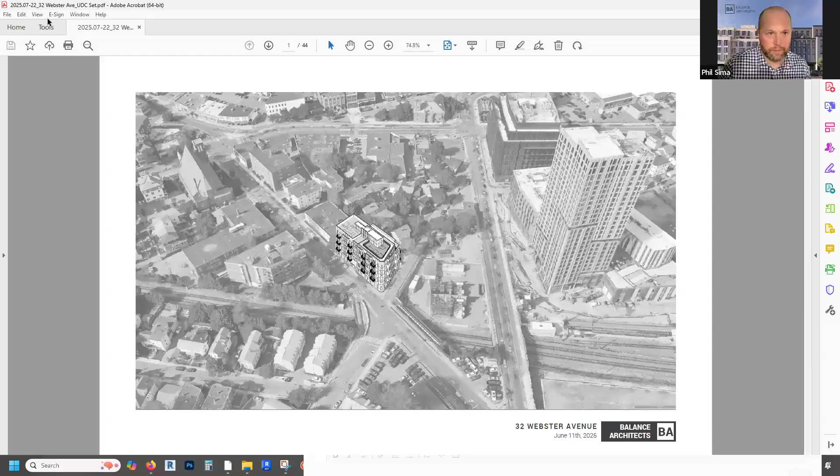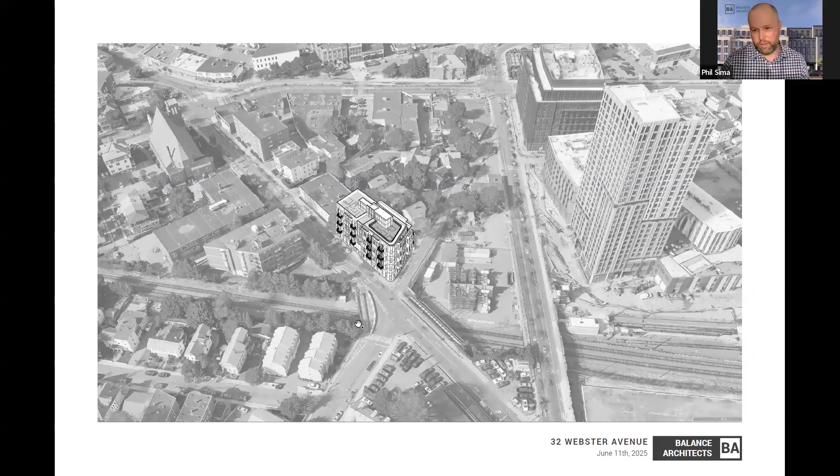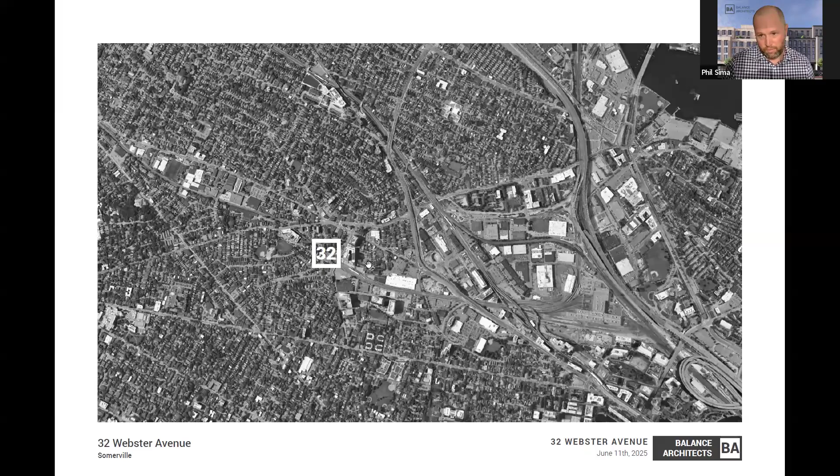Great, yes. Okay, so thanks everyone. So the project we're looking at is 32 Webster. It's right outside of Union Square on Webster, kind of at the top of the hill where the train tracks go down—there's a substation over here. It's an MR4 building, so very close to Union Square, right at the top of that hill, at the corner of Webster and Newton, both kind of sloping down from this high point on the corner, which we'll see in some photos.

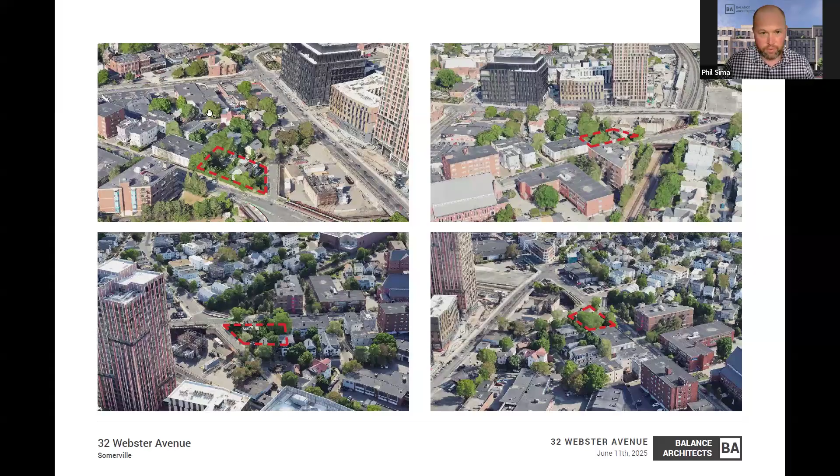So we're MR4, we abut some NR. We're not on a pedestrian street, so we're going to do an all apartment building, not a mixed-use general building, and it's very close to public transit. We do not have any vehicular parking in the project.

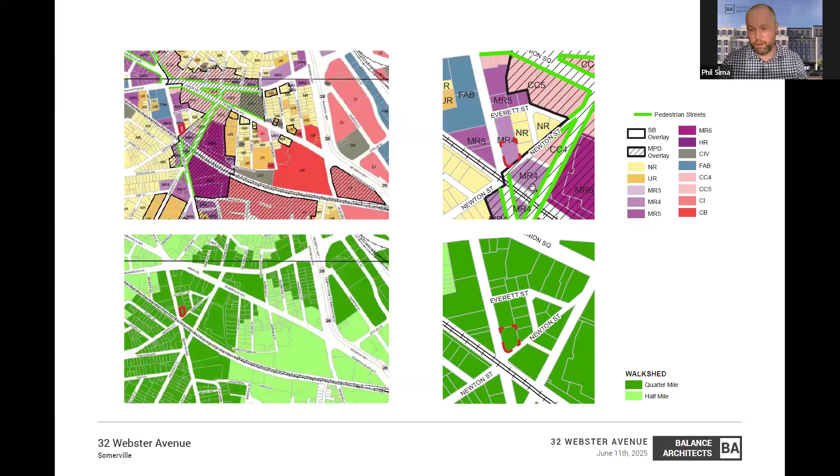So the general massing: it's one of these buildings that's longer than 100 feet, so we're creating two main masses to split the length of it along Webster. We have this primary mass to the left with some bays, balconies at the entrance, and the main residential entrance, which is on Webster. That is inset a bit, and a change of material happens there.

And then we have this kind of corner element that wraps up to the corner and down Newton, again with bays and balconies on the facades. So that's looking on Newton for that side of the street, and then again, this kind of really unique corner condition that we have.

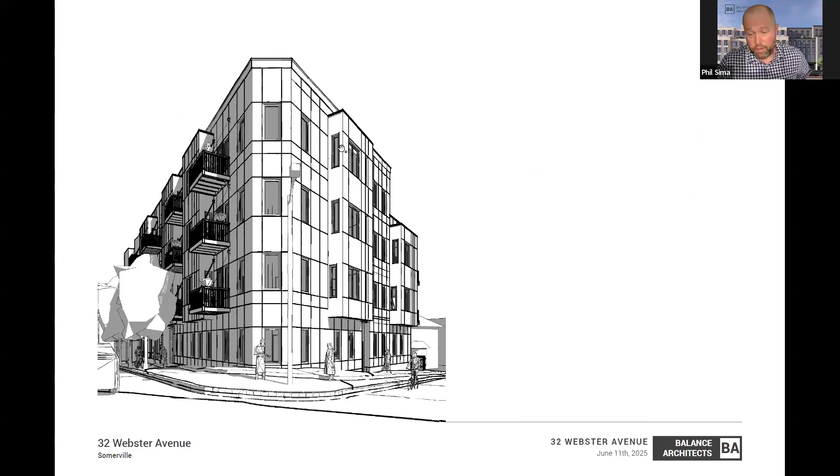The massing is really interesting here, just based on it being MR4 abutting NR, so we have to step back that top floor. It creates some great cascading effects. So on the top, we have a common roof deck for everyone with amazing views based on the orientation. And what you're looking at on that third floor are private roof decks for the units that face off the back there.

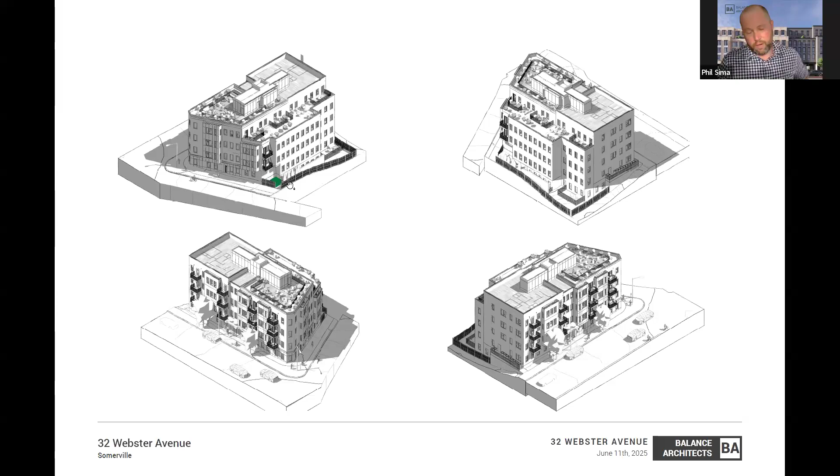And then you can kind of see some movement in the building based upon NR setbacks that are rear yard, not side yard, as well as we're showing a pad mounted transformer in that side as well.

So I won't go over the whole zoning, but I'll just do a quick floor plan review. A couple of studio units on the basement floor face out because the site slopes so much, so we actually have to make this a deck - the grade is lower than the building. There's some MEP and amenity space, and then on the ground floor, the main entry, as we said, is on Webster.

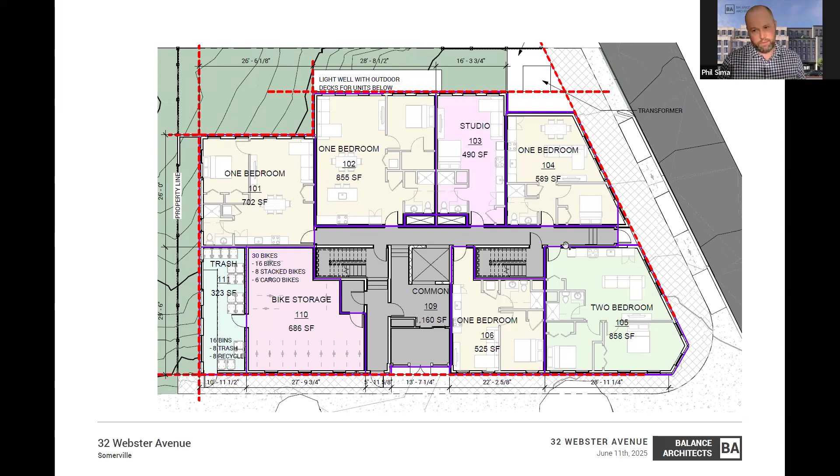We have one-to-one bike storage, a trash room that's accessible from that, and then one bedroom, studio, and two bedroom units. And typical 2 beds, 1 beds for floors 2 and 3. On that top floor is where we start to step back and see some of those private roof decks along that plan north facade, and then a common roof deck for everyone up here, with MEP happening to the left.

Just to be noted, we're in MR4, but there is a fully affordable housing project being proposed directly adjacent to us, I think fully accepted, that's going to be up 6 stories. So we're going to be kind of the small kid on the block when that one is done.

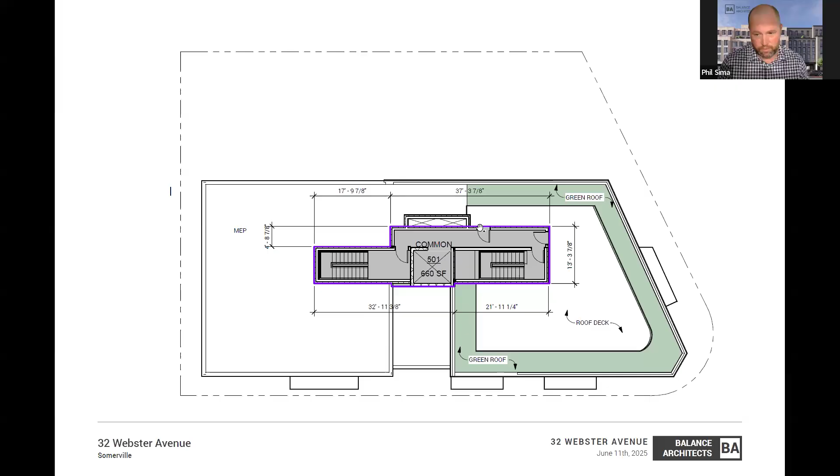So I'm going to let Aaron jump into more of the site plan, because I think in terms of architecture, this is our front entrance, this is the transformer side entrance. Aaron, are you able to jump on and discuss?

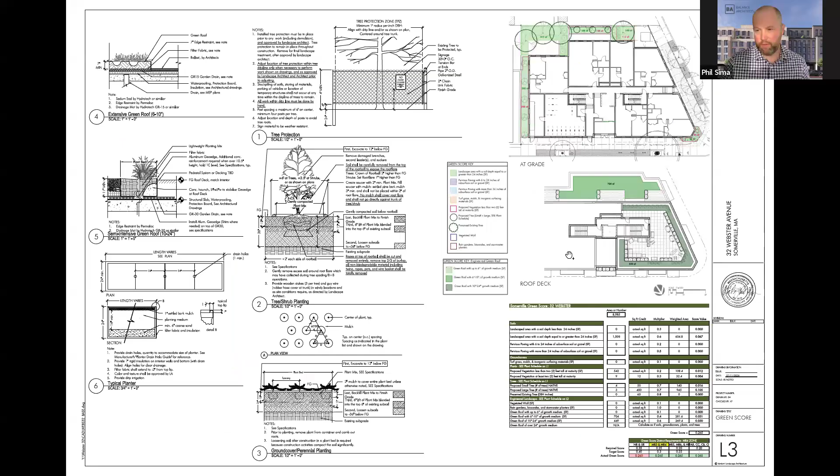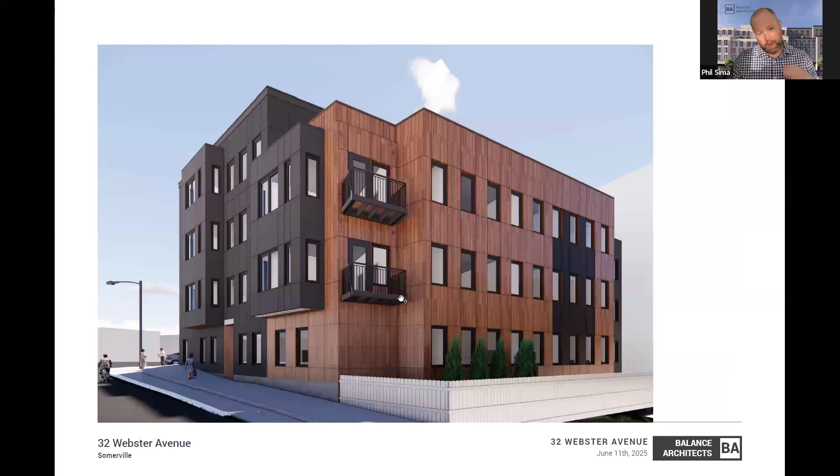When you wrap around the corner, darker material bands go all the way around Webster. Then this more natural looking wood facing the back, a rigid fenestration pattern that goes towards that side yard. There's no proper rear yard except when you get back here, and that's what this view looks like from the corner.

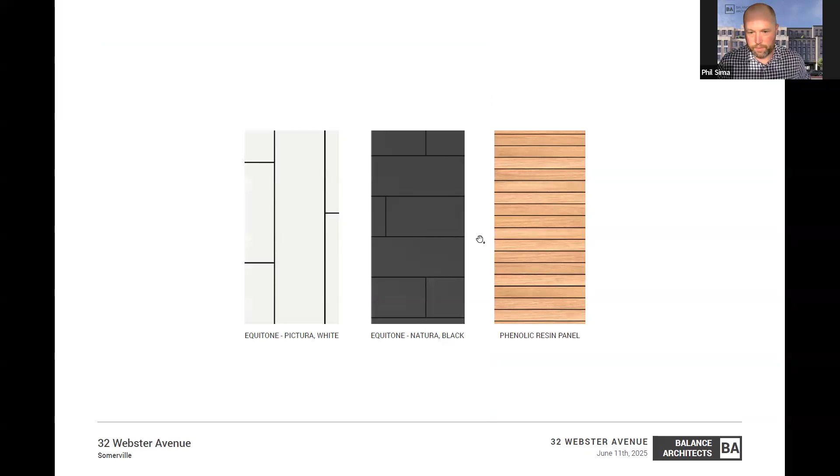We should have been showing the plantings that Erin has proposed, which would soften this edge. But in terms of the colors and the facade, this is generally what it would look like with this option. And these are some of the materials for option 1.

Equitone panels for the cream color and the charcoal, and then a wood look product, like a phenolic resin panel that won't fade and age over time, as opposed to real wood, which can look funky pretty quickly.

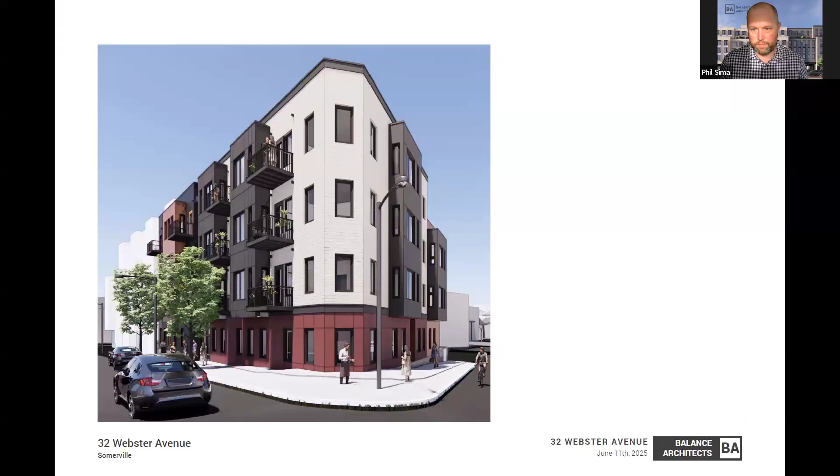Some of the materials, again, clapboard siding, white, charcoal, with some of those Equitone fiber cement panels as the base.

Then option 3, this is kind of funny, we presented the dark, black and white scheme at the first neighborhood meeting. One of the comments was, why don't you ever have any color, you architects? You just make boring cold buildings.

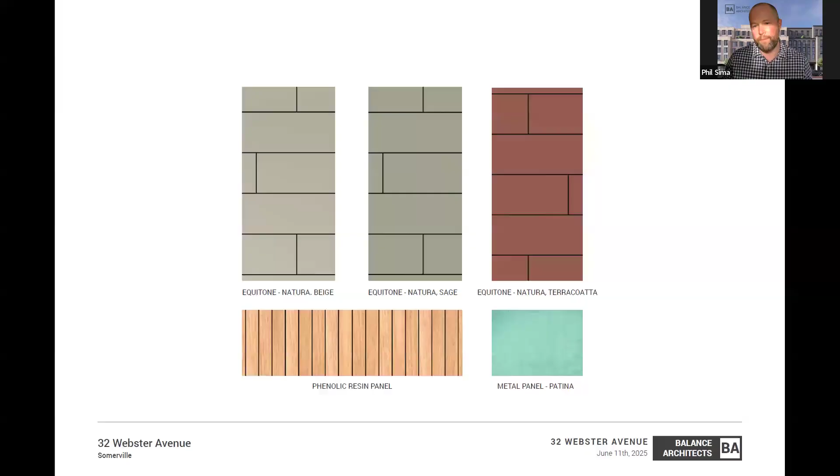So we have beige and sage, and again some of the terracotta, the red color Equitone as well. I think we came up with a bunch of other palette sketches, but I don't want to get into that because they're not our primary options. That's what we have for everyone tonight.

Great. Any comments from the commission?

Deborah's still here? Okay, yes, awesome. Sorry, I lost you on just the top row. I was like, oh God, do we have to do this without the architect?

I guess I have a question. So all of these are the same form, it's just different material and color selection, correct? Yeah, we're not looking at massing options. I don't know if we need to look at massing options, I'm just putting it out there. MR6 triggers massing options, MR4 is facade. Okay, thank you, that's cool.

Clarified, okay. So of this preferred set, I think the first and the third are the most successful. One thing I'm curious about, are those wood windows? They'd be like some type of UPVC, but with different finishes. We're using Oknoplast, it's from Poland, used on a lot of projects. They're awesome, they look really good, they're high performance.

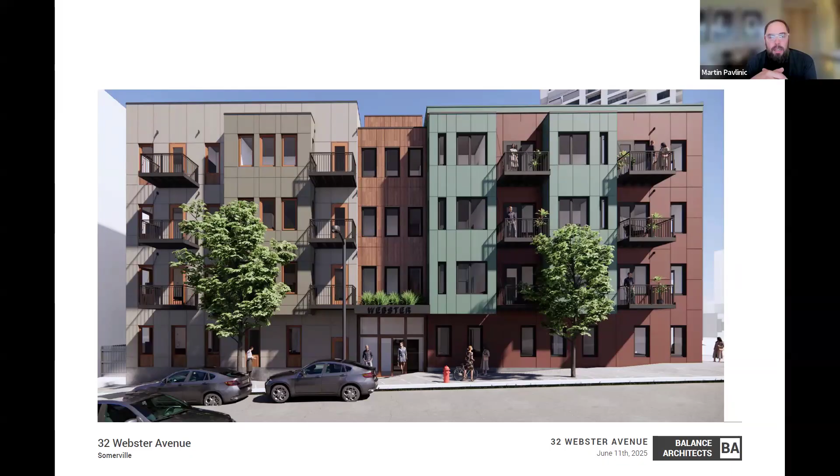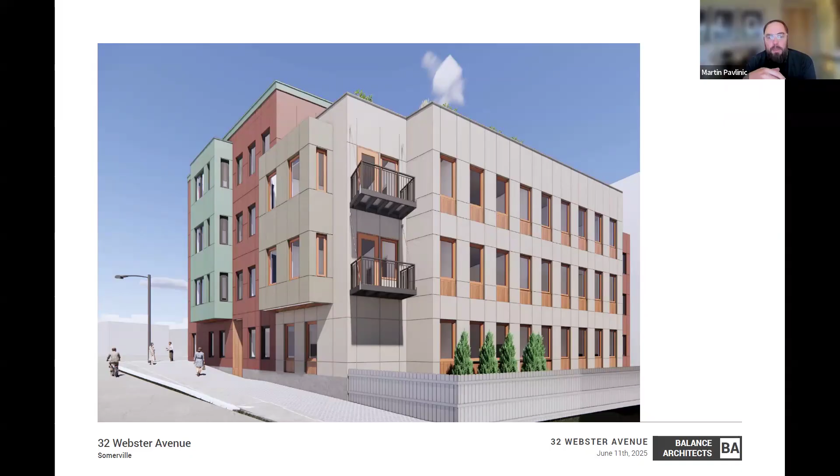That's, when I squint, this is the one that gives me a bit more of that contextual view. I agree the clapboard one isn't as successful. It seems a little on the nose in terms of trying to replicate context. But I think this one, of the three, is the most successful, especially around the back, because the large expanse of wood in the other two options is a bit relentless. I think it's just too much, especially if it's not real wood and it's wood-look. It's too much of one material, especially that material. But I think this is a really handsome way to have a resolution around the back.

I do like the back on this one. I definitely agree with that. Can we go to the corner view as well?

This is kind of the one that I struggle with, because it just feels like the prow of that building should be something special, but the detailing is the exact same on the top, middle, and bottom. It's just kind of unrelenting, and I feel like as the grade falls away on that corner, it's going to look potentially unfinished in its current state.

I do wonder how much the planting on the corner would offset that, but I agree. That's such a tough spot for planting, though. Yeah, agreed. It just seems like something else needs to happen, especially at the bottom maybe. I don't know, it needs to hit - there's something else that needs to happen at the bottom to have it feel finished.

Okay, yeah, we had originally started with kind of a curved corner, and it was really special. So we'll certainly come up with some ideas to enhance that view.

It feels like it should be special, but the bays are so much more visually impactful that it's a little hard to feel that from this view. It is a background expression where you want to have some foreground pop or power. Yeah, I agree with that.

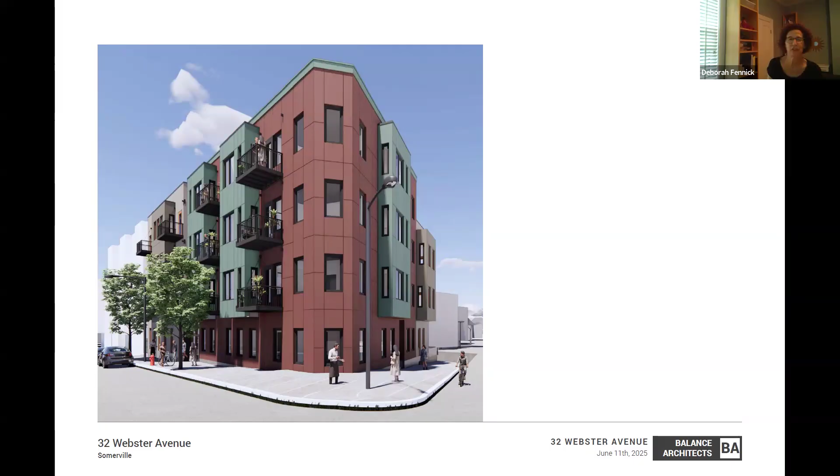It looks more maroon than terracotta to me. It doesn't have the orange in it that I would imagine. And then it would look good with the wood finish.

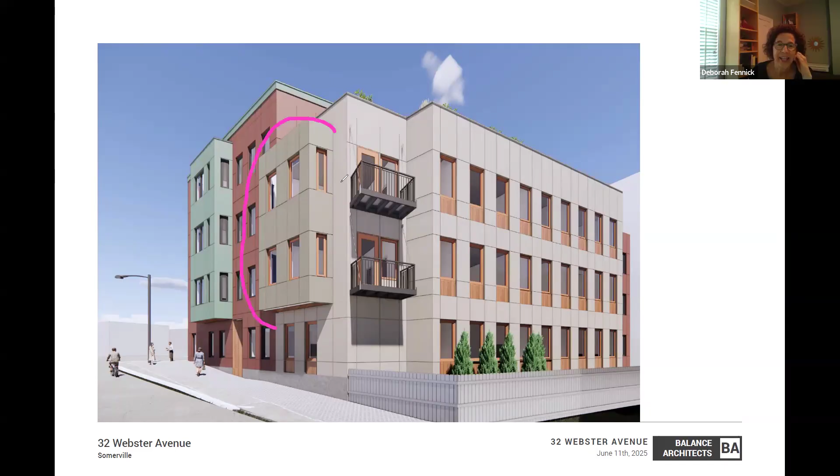And I think actually, if we go to - what street was that? The more regular side, Newton - if for option 3, yeah, that gray panel, that could be a colorful panel. And then I think that would sort of marry this a little more to the other major street. You mean the one that's slightly dark, not the primary one in the back, but the bay? It has - no, actually the one next to the right of that, I see, which is a gray panel, I think. I think that could be colored or something.

The other one feels a little too literal, although I guess that bay could also work. But I just think where the railing is, that section that has gray behind it - that could be a color. And I think that could be a nice marrying of the other expression.

The expression on the street, the colorful street, the street that has Webster Avenue.

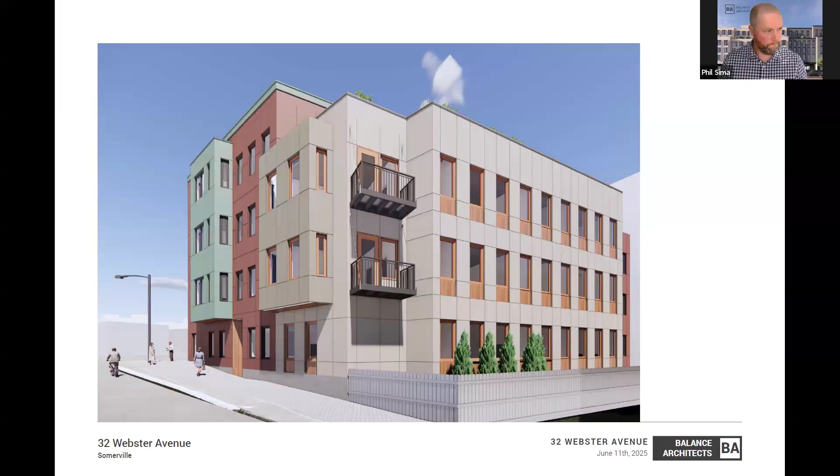I think something sort of understated but special on the prow of the building, something like shallow Juliet balconies that wrap around, something subtle that helps define that lower band without making the street level section, which goes under all of the bay windows, feel disconnected.

Yeah, great. I'm sure there are many ways of doing it. I just made up one way using some of the elements you have on here anyway.

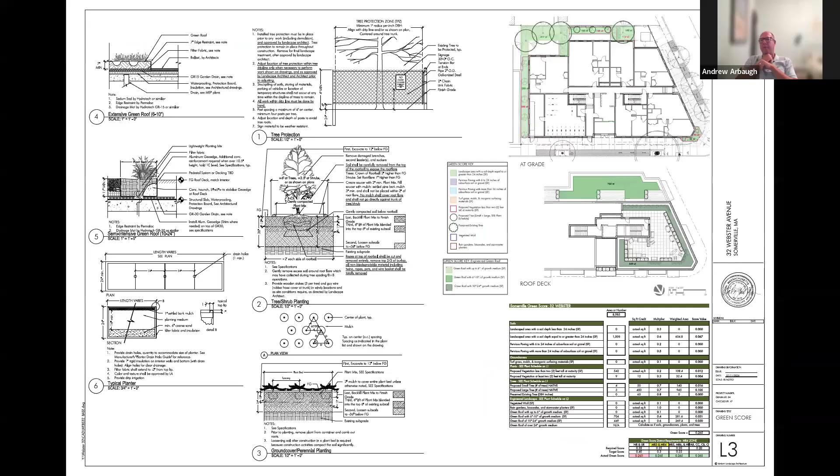On the landscape plan, I didn't really have any major issues. I know PSUF will review the streetscape and provide comments on the tree selections. The one planter on the corner is a tough location, but I get why you're doing it. And the roof deck, there's nothing really, it's fine.

The fence seems a little bit, doesn't seem like it's quite the same language as the building, but it's minor. The wood privacy fence at the grade level is more just along the top property line, more just for privacy. Along that left side, we're not showing a fence. Its reading is a little bit traditional on a building that doesn't read that way, but it's minor.

Great. Are there any more comments from the commission before we move to our votes for the evening? Nope. Keep it rolling. All right, let's keep it rolling, says the man.

So just to clarify, does the commission want to conditionally approve option 3 with conditions that the architects think about differentiating that corner prow of the building to define the street level section, as well as the back colors, or should we approve option 3, and then do we need to see another round?